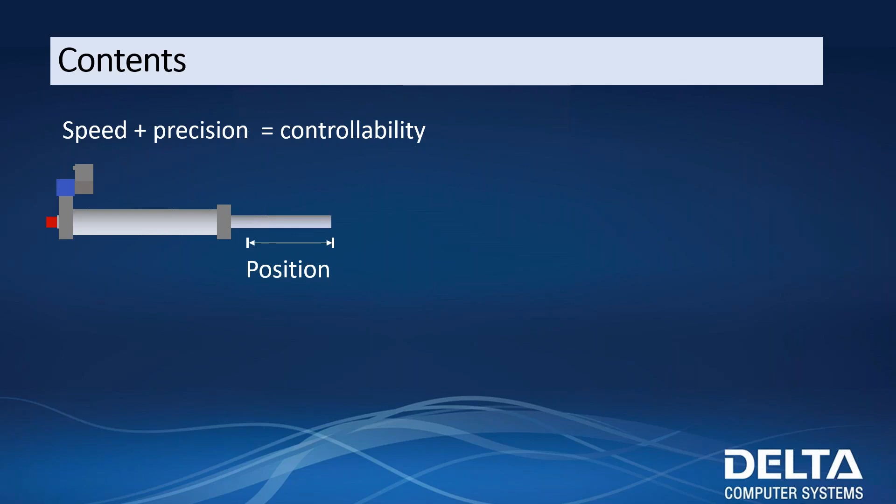So speed plus precision is controllability. All right, it's fairly easy to have a high-speed application, and it's fairly easy to have a high-precision application. But to have them both together, you need a great deal of controllability, and that's where the Delta RMC comes in. With our RMC, we do high-precision position control and also high-precision, high-speed force control.

Here's a list of a few applications. If any one of these applications rings true and you'd like to get a little bit more information, feel free to reach out to GCC or to Delta. We've got more purpose-built webinars that just dive a bit deeper into each of these applications, but the purpose of this is just a brief overview and really more of an introduction to each of these applications.

Presses are one of the applications that we do a great deal of work with. Having that high precision position control and force control is a great tool. We'll get to see that here as we continue through this webinar. Simple machines are another area where high precision and controllability are actually extremely important. I've got a few examples on a live system here that I'll be able to show as we continue through here.

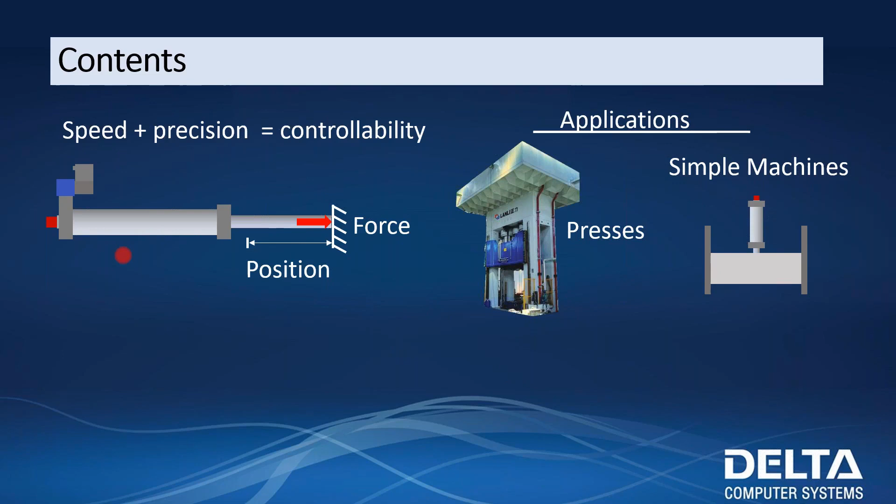Another application that we dive pretty heavily into is the test application. Adaptive cycle control is something that we can do. I'll get into what this looks like, but we're able to look at individual cycles, and based upon your desired peaks and valleys, we're able to actually scale up as we're going through. And then 6 degrees of freedom is another application. This is just a list of a few applications that we've done. There's many more, but here's a great introduction.

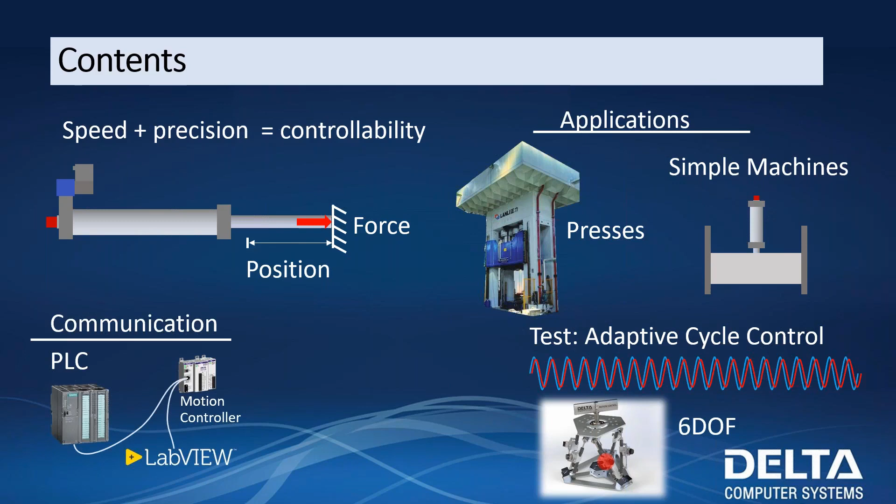Communication is also something that's very important to Delta. If you can do the application, it's great, but if you don't have any way to then take that data from our motion controller and put it into something like PLC or to LabVIEW, sometimes it doesn't really have as much use. So we've also got great examples built for communicating with PLCs, whether it's Siemens, Allen Bradley, many others, and other protocols as well, like LabVIEW or MATLAB, and I'll demonstrate our LabVIEW example here as we go through.

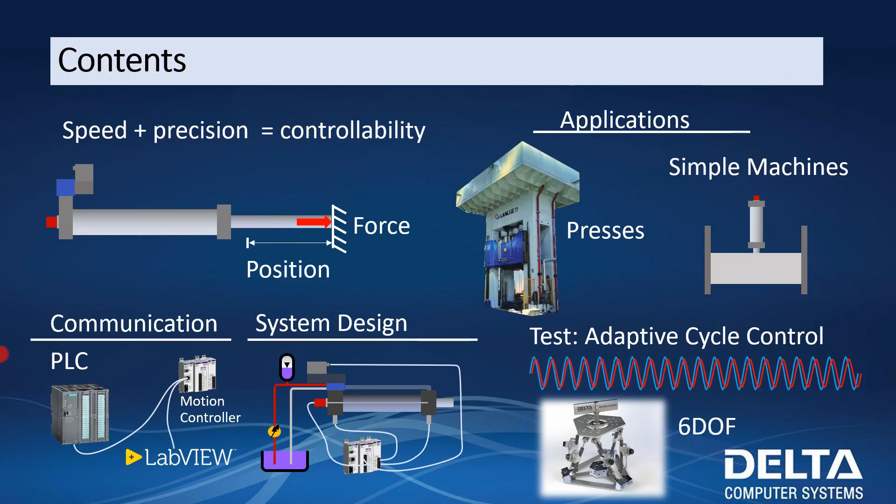We're also going to talk a little bit about system design and just what Delta recommends. Keeping things simple is always easiest. We'll talk a little bit about the do's and don'ts of our hydraulic design as well, and what we found to work best. So I've got a live example here.

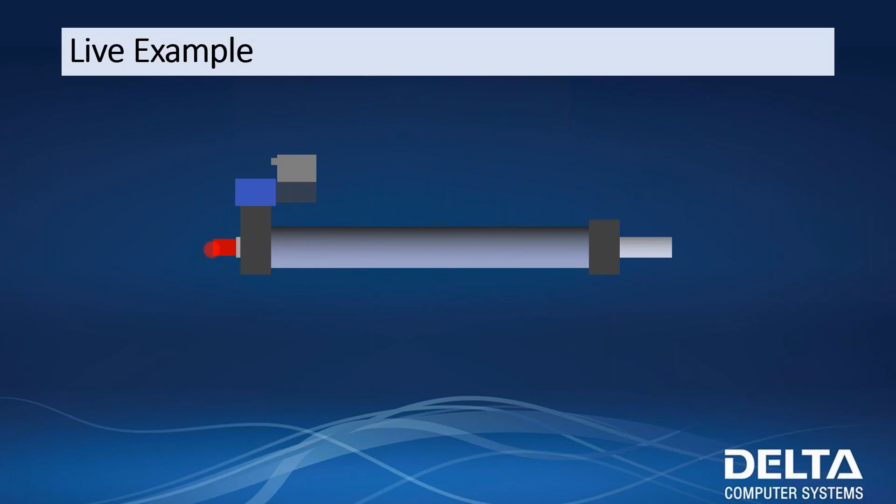I've got a cylinder set up with a high precision, good quality servo proportional valve, and I've also got feedback, high precision feedback that we're going to be using for this example. My cylinder is 24 inches long, 24-inch stroke. I've got 2-inch bore here, 26 gallon per minute valve, a 1 micrometer transducer. Now, with this setup, I can achieve very fast motion, about 35 inches per second is as quickly as I can go, and I'm able to hold position within a thousandth of an inch.

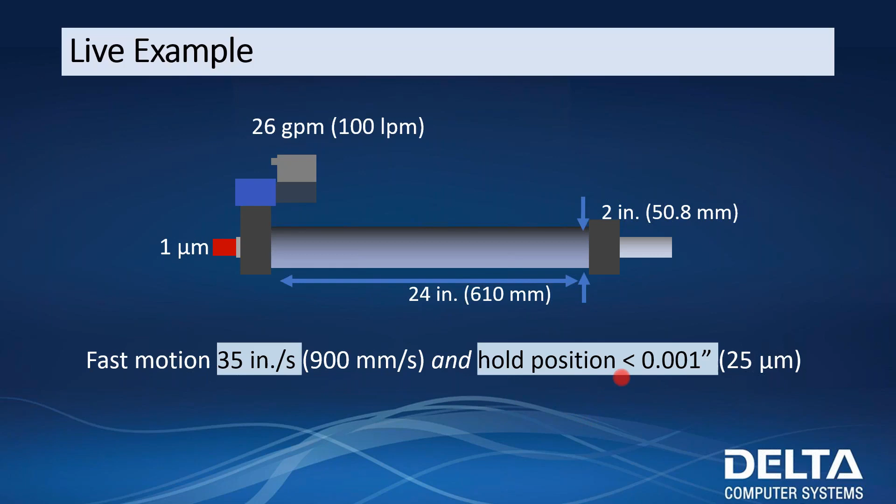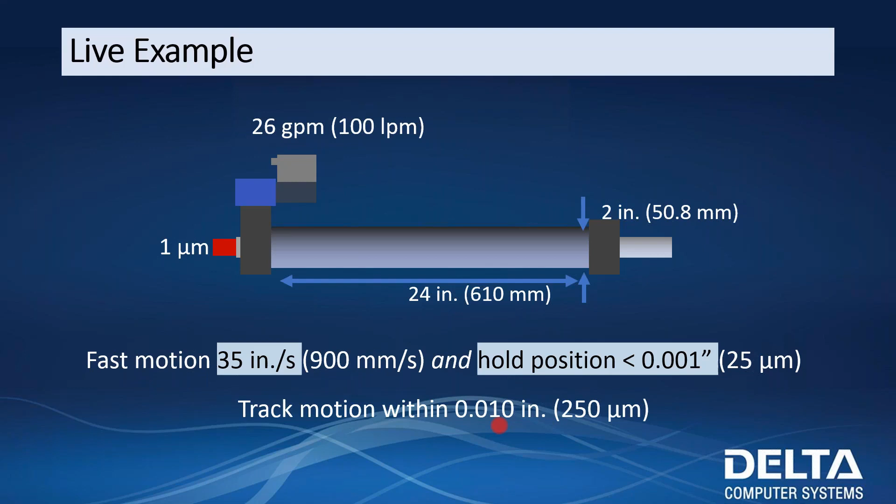I'll show you that here in a second, but just with this setup here, we're able to hold a great deal of precision. We're able to get there very quickly. We're also able to track motion within about 1/100 of an inch. Again, this is very application specific. With our setup here, this is what we're able to do. So without further ado, let me jump to our live system, and I'll give you guys an introduction here. Okay.

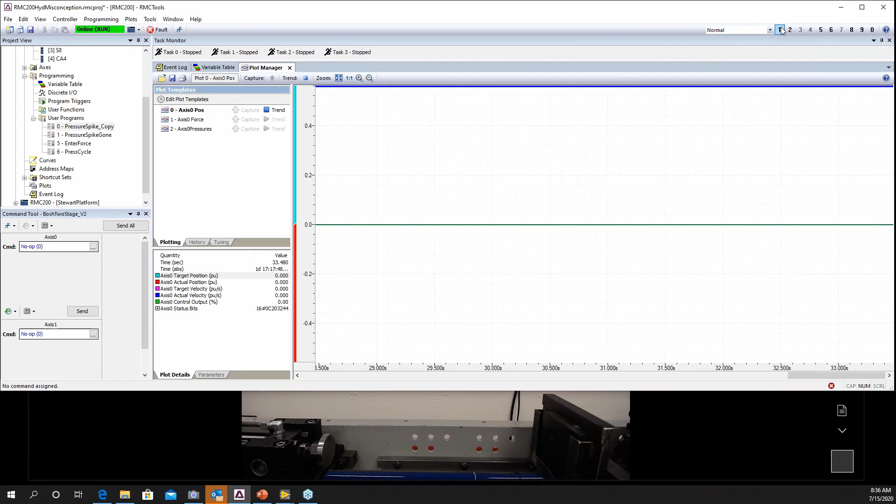Okay, so you saw the cylinder jump out here, and I can see my move that took place here as well. So this move right here, I can see as I'm going, I'm holding with a great deal of precision. Even while I'm traveling in this move, 20 inches per second, I'm still holding within about a thousandth of an inch, really. You can see my actual position is 12.220, and my target is 12.220, and my actual is 12.219. So we're holding a great deal of precision here.

And I can see kind of settling there a little bit, but if I trend my plot here, I can see that I'm just jumping back and forth about a thousandth of an inch. I go up to 18.001, and I go down to 17.999. So I'm holding very steady. You can't even really see that thousandth of an inch here on the cylinder itself.

Okay. Now I can do another move, and this is just all built into Delta. We've got a very nice set of commands here. This is our basic move command. I choose a position, a speed, an acceleration, and a deceleration. And this is all scaled in inches right now. So I could, for instance, say I'd like to move to a position of 2.

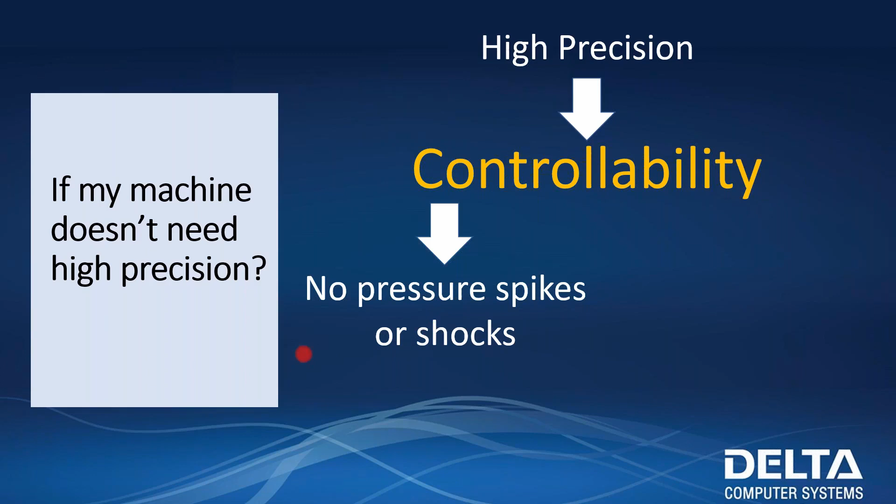But having these spikes eliminated is going to give you a much greater lifetime on your feedback, on your transducer, on your valves, on your cylinders. Everything's just going to last longer when you have high precision and controllability.

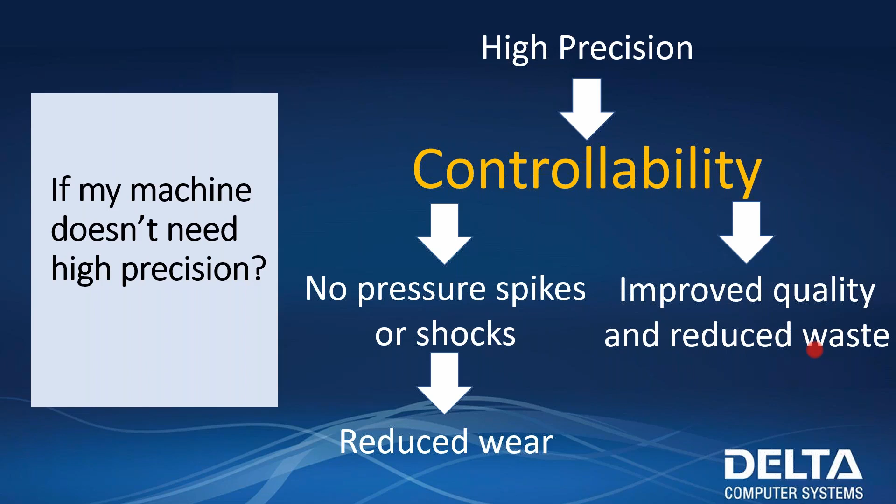The other thing is you're going to have improved quality, and you're going to reduce waste. Much easier to improve the quality, make sure that things are consistent with this controllability, reduce waste, only go as quickly as you need to. You know exactly how much pressure you need. It just makes things a whole lot easier in your system.

So here's a great example of a simple machine that doesn't really require precision, but a high degree of controllability is still very beneficial. This is an application that we were just involved with recently. This is the mining application where there's coal on a conveyor belt, and there's a... And again, it's a very simple application, right?

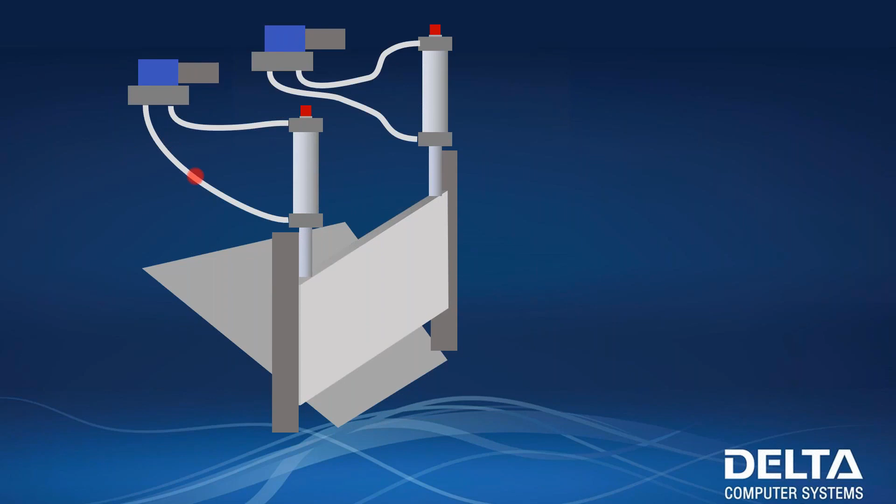Just having two bang bang valves on here, what this does is we start to see pressure spikes. Things start to wear out. For this particular application, every 6 months or so, they were having to replace components because there's just so much force constantly being seen by these cylinders and these valves and these transducers.

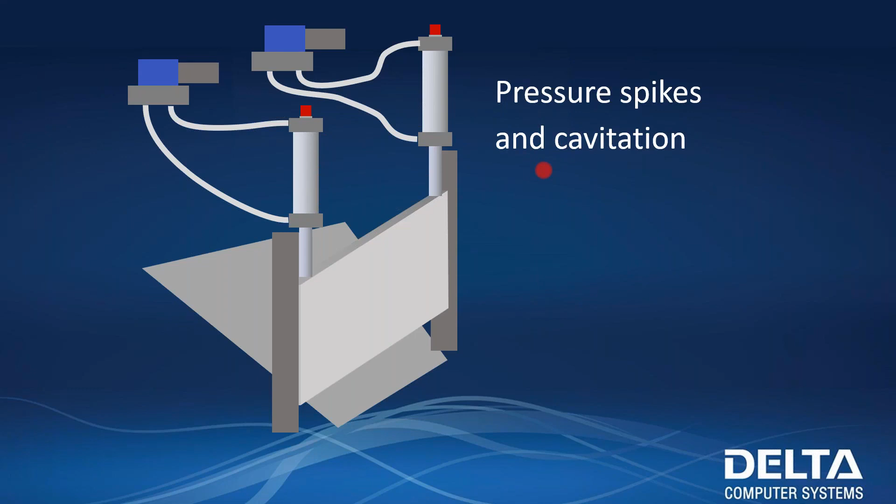We see cavitation as well. With the pressure spikes, when that pressure goes below zero, we'll start to see cavitation, little air pockets inside the hydraulic fluid, and that's what can really start to wear things down.

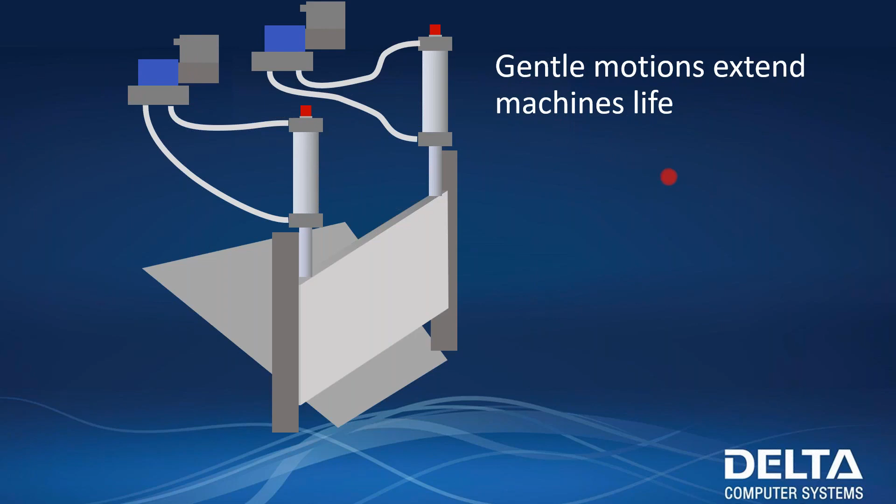Okay. Now, if we instead make these servo proportional valves, we can have gentle motion, we can extend the life. Sensors are going to last a lot longer. That's one thing that really will start to wear out quickly. But the entire life of the machine is just going to be much better. You're going to be replacing parts at a much lower frequency when you have gentle motion.

Okay. See what that looks like here on our system. So again, I'm going to be using my live system here. I'm going to trend my axis 0. Right now, I'm trending. I can see I've still got my target and my actual position, the blue and that red line there. I also have channel A pressure and channel B pressure.

So I have pressure transducers on either end of my cylinder, so I'm able to see what the pressure spikes are going to look like here. So first, what I'd like to do is run my pressure spikes program here.

Now I'm going to briefly go through the logic. You'll see that Delta has a very nice approach for actually setting up this logic. With the setup that we have here, you're able to achieve whatever it is you'd like to in your system very quickly, and even better than the speed, it's very easy to troubleshoot through, understand exactly what's going on, and if there's a problem in the system, we're able to diagnose it very quickly.

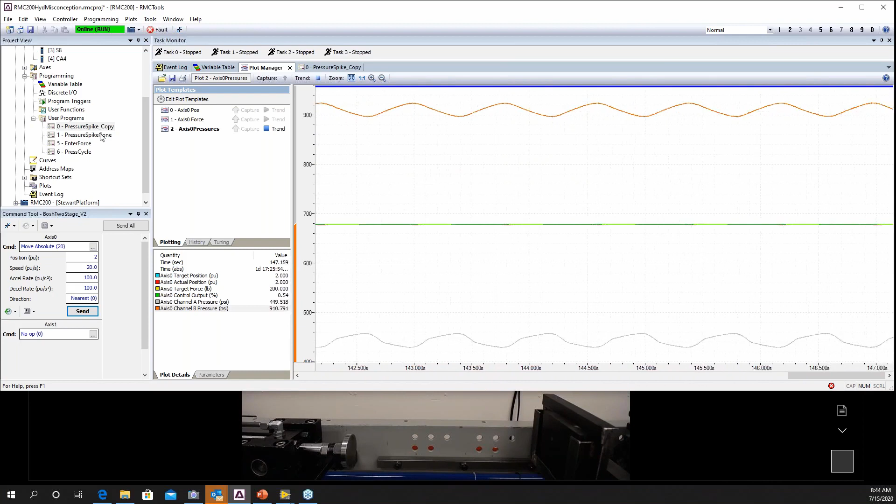One quick thing I want to mention here, I'm going through this very quickly. I know that there's a lot of information here. Again, if you would like to dive deeper into any one of these topics, please reach out to GCC. They're great. They can really help you guys out, and we've got a whole lot more information on any one of these individual topics. Okay, so let's see what this program looks like here.

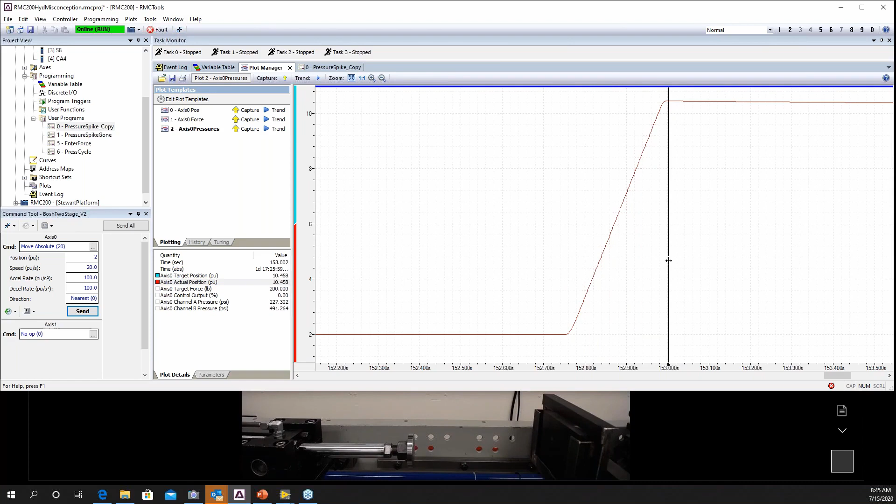All right. So we'll first look at our actual position, see what this looks like. So my actual position, this red line here, starts at a position of 2, and we build up to a position a little bit past 10. We're going to about 10.5 inches here, so maybe for this application, that's fine. My control output, it's just ramping right up, right? This is open loop control output, so there's not really any controllability here.

Now, when I look at my pressures, I really get a better picture of what's going on in the system. You can see the orange line here is my pressure on port B, and the gray line here is my pressure on port A. It's very noisy, especially at the end and the beginning here. There's just large spikes, especially at the end here. This isn't going to be good for the system. I don't know if you were able to hear it through my mic, but very loud, very noisy. There's a lot of shock here, and it's just not really what you'd want if you're trying to prolong the life of your components. Okay, so that's without controllability.

Let me show you another program, and this would be more of Delta's approach. Again, I'm just moving to the beginning here. You can kind of disregard this step. This is really the step that we care about and the step that's going to be achieving exactly what we did in open loop before. I'm, again, just using a move absolute command, moving to a position of 10. This way I can specify my speed. In this case, I'd like to move at 20 inches per second with an acceleration of 100 inches per second squared and a deceleration of 100 inches per second squared.

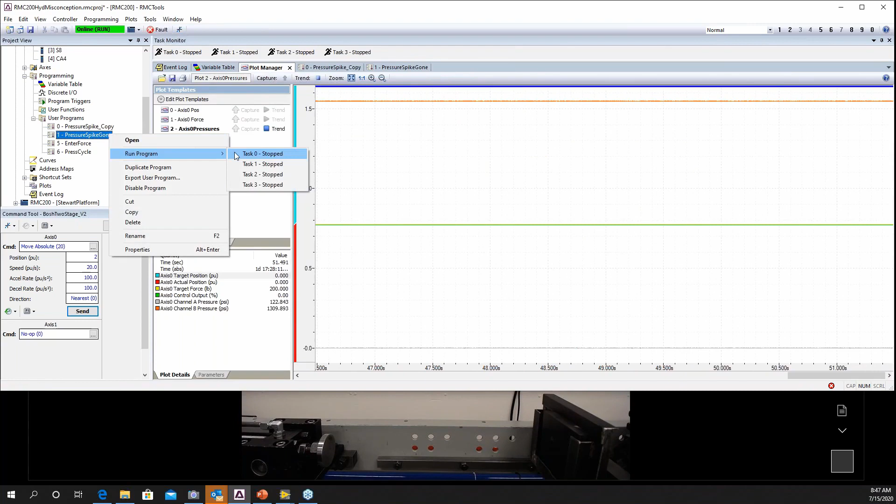Now, after this, my program ends, and the Delta RMC is going to make sure that we maintain this position of 10 inches. So very simple, easy to set up, and we're going to get a great deal of controllability from this setup here. So let's see the difference. So this section of my plot here is what I really care about. I'm going to create a trend plot really quick. Now, we'll get rid of the other items.

At first, my motion profile doesn't look all that different from the one before. The big change here is that I actually get to 10 inches rather than 10.5. But again, we're going to say for this application, 10 or 10.5 doesn't matter quite as much. But if I look at my control output, you can see it's a much smoother ramp, right? It's not that violent jump up and violent jump down.

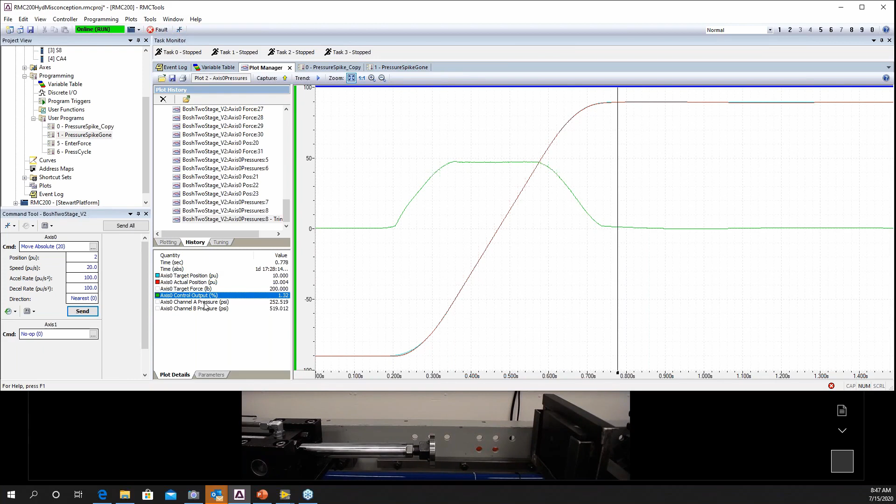If I look at my pressure, you can also see this is a much smoother pressure profile on both the A port and the B port. Something like this, you're not going to see large damage to your controller because we're able to control these accelerations. We're able to reduce them and get them to a point where this system is just going to have a much longer life. Okay. So let's jump back to our slideshow.

So here's a few common position control features. You've seen a little bit of what we can do, motion profiles. We could have much longer, much more involved programs, user programs that you saw. I demonstrated just a few smaller user programs, but we can get much larger and much more involved programs.

Curves, I'll demonstrate this here in just a minute, but we can actually plot points, and we can then have the controller follow those points and follow a profile. A good example of someone using our curves is USNR. If you haven't heard of them, they're the world's largest sawmill machine manufacturer. They love Delta Control products. They've been using our products and our curves in specific for curve sawing. It's a great tool and just really useful. You'll get to see it here in a second.

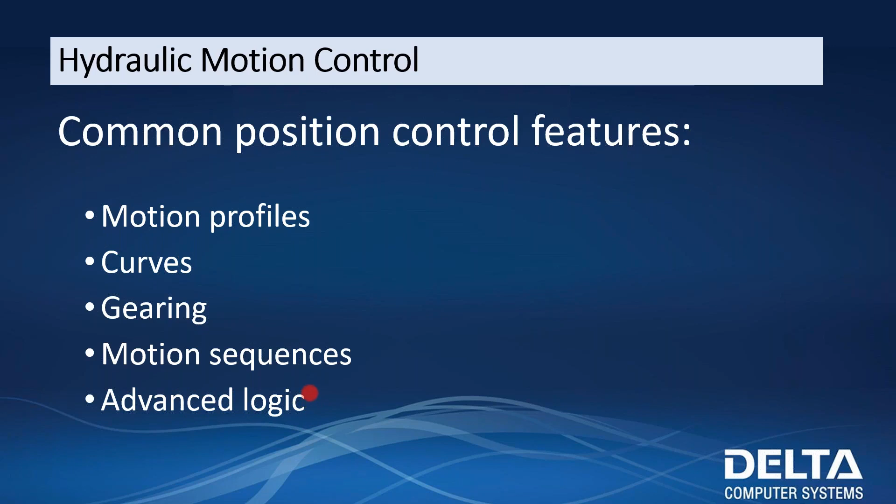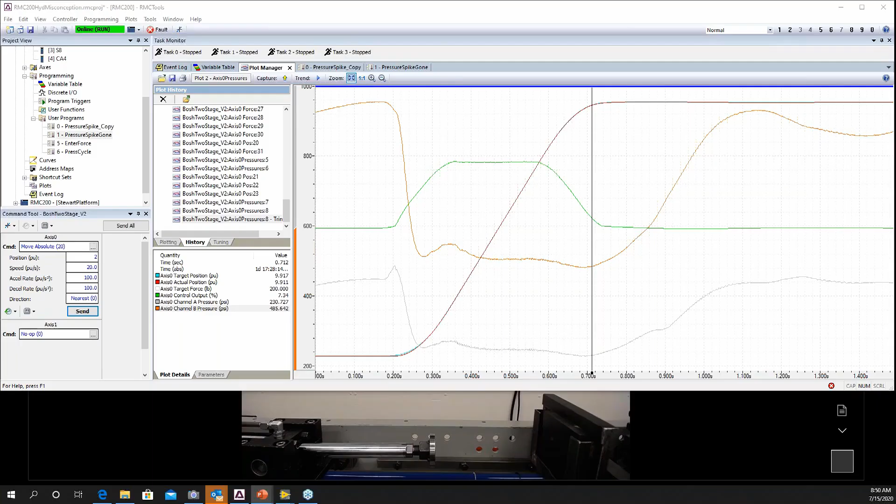I'm going to jump back to RMC tools, and I'll quickly show you an example of our curves here. Again, since we don't have a ton of time today, this is just a brief overview. If you'd like to see more, go ahead, reach out. Delta also has a large library of webinars where we go more in depth on each of these topics.

I can add more points just like this. I can enter them in, and I can copy and paste entire profiles like this from an Excel worksheet. Say you have 1,000 points and you'd like to bring them all into RMC tools. So it's a very versatile tool. We're able to run these profiles and able to do it no problem at all. Okay, so that's our curves. That's just a brief introduction. Let me jump back here.

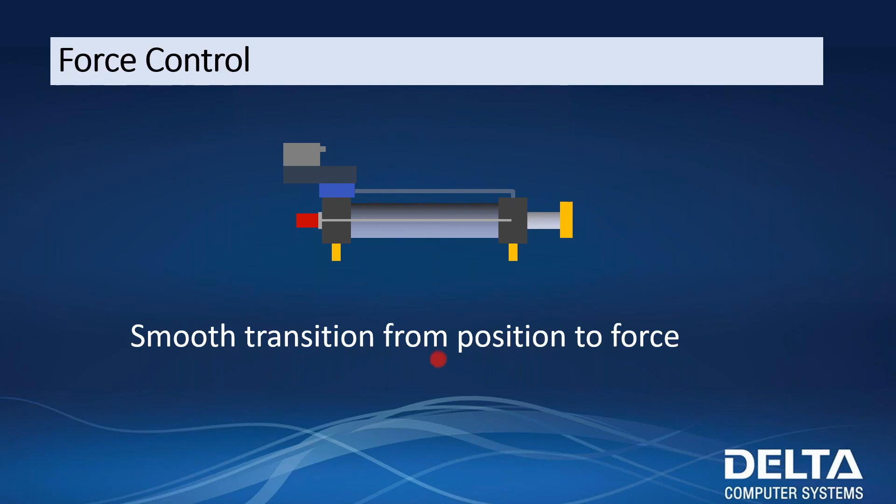All right. Now, force control is something that's difficult for a lot of controllers to achieve, and it's an area that Delta really excels in. Now, the hardest part of force control is generally the smooth transition from position to force. This is where a lot of things can go wrong. It's difficult to get a nice smooth transition where you don't push too hard on your part, but in addition to that, that you, at the same time, get up close to your part very quickly. Doing these things together can be a challenge for many controllers. So let me show you our solution for that.

Okay. So our Enter Force Control project here, I'm not going to go over it too much. It's a little bit more advanced. I want you to take a brief peek at it here, but I'll show you what we're going to be doing here. Basically, the idea behind this is I'm going to be going quickly up to a position.

Then I'm going to be slowing down as I start to get close to my part. Got a speed of 20 here, and then a speed of 1 here. Once I see a little bit of force, I'm going to go into force control. And then for this program, we ramp up and down between two forces.

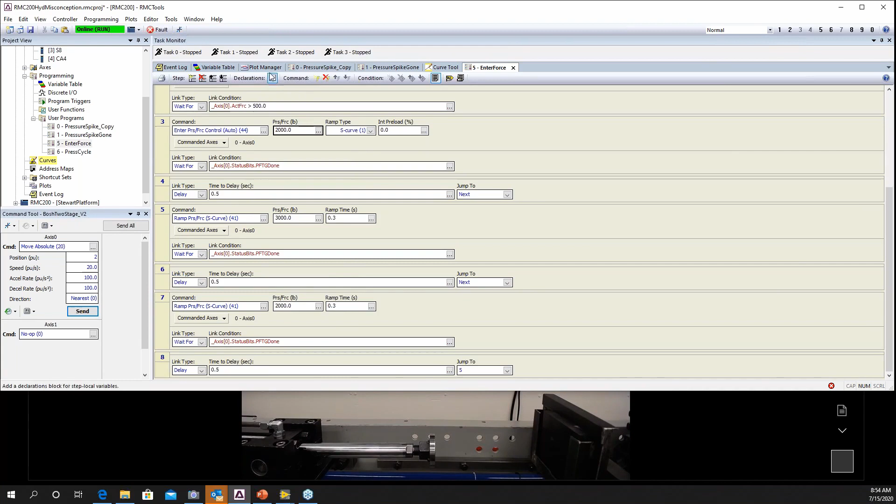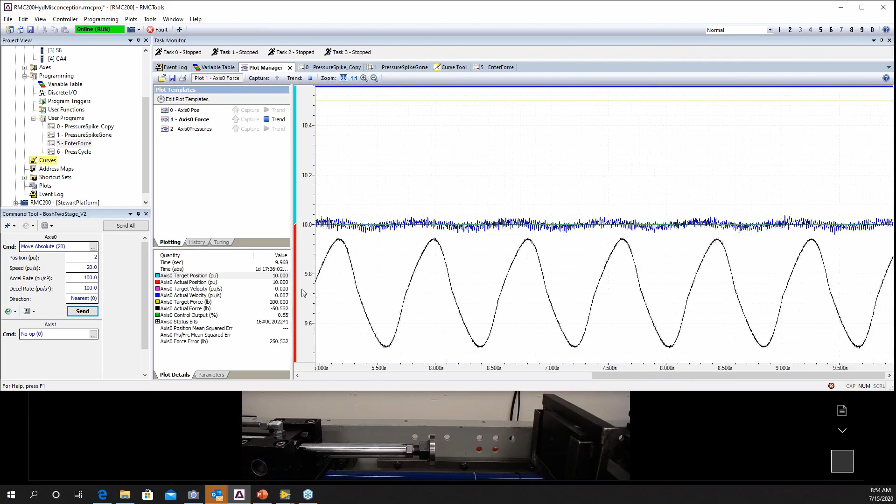Right now we're not trying to hold force. Instead we're trying to hold position. You can see we're holding within 1/1000th of an inch. We're just free floating. We're not really seeing any force at all. So I'm going to run my Enter Force Control program, and you'll see my cylinder jumps forward quickly, slows down.

We make contact. We're controlling very well. We're ramping up and down between a couple forces. Okay, so you can see that there. Right now we're holding force within, looks like here, once we settle down, within 5 or 6 pounds. So fairly precise. If we have a different valve on here, we could even get it more precise, but we can do very high precision force control.

So if I analyze my plot here, I can see this blue line here, my velocity. It's gone up very high, gone quickly, and then we've slowed way down. We could probably even reduce this time here if, say, this was an actual production model and you wanted to get quicker cycles, we can reduce this down.

But as we get close, we start to see a little bit of force if I zoom in here, and then we go into force control. We start tracking, and we're tracking along with our force control, and we're able to control this very well here. Let me show you this one more time just in case you missed the physical cylinder.

Okay, so we're tracking to the beginning. I go quickly up, making it to force control, and that's a very smooth transition into force control here. Okay, so that's one application. Let me show you another.

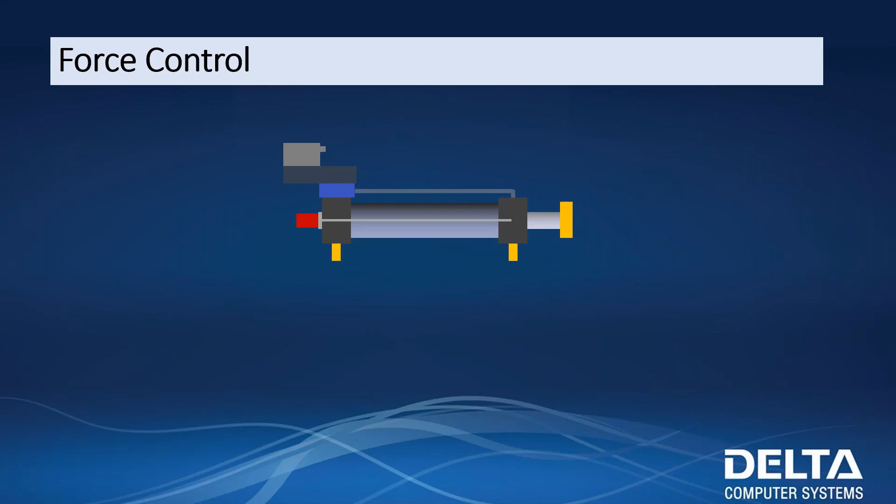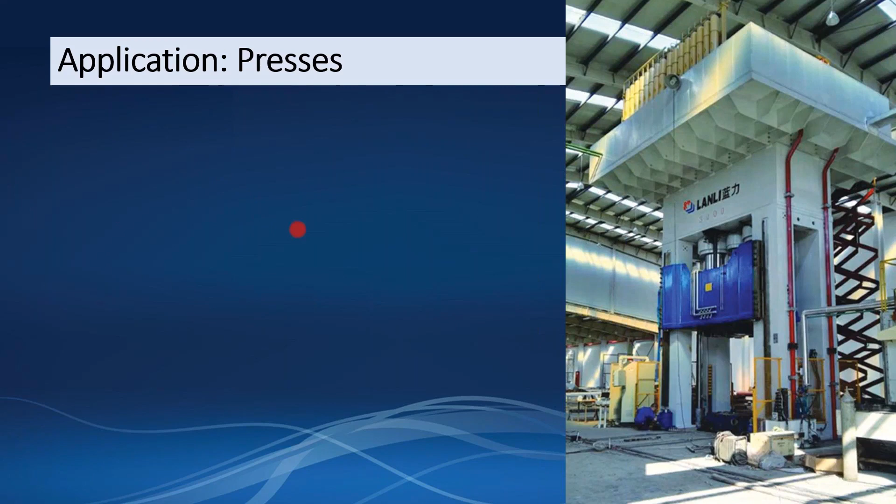Another application here is going to be presses, right? This is something that Delta does very well. We're heavily involved in the press industry, and there's some unique challenges to the press industry here. So position and force need to be controlled, as we saw before. There's also a synchronization that needs to take place. Now, this synchronization takes place through a program that we have called electronic platen leveling.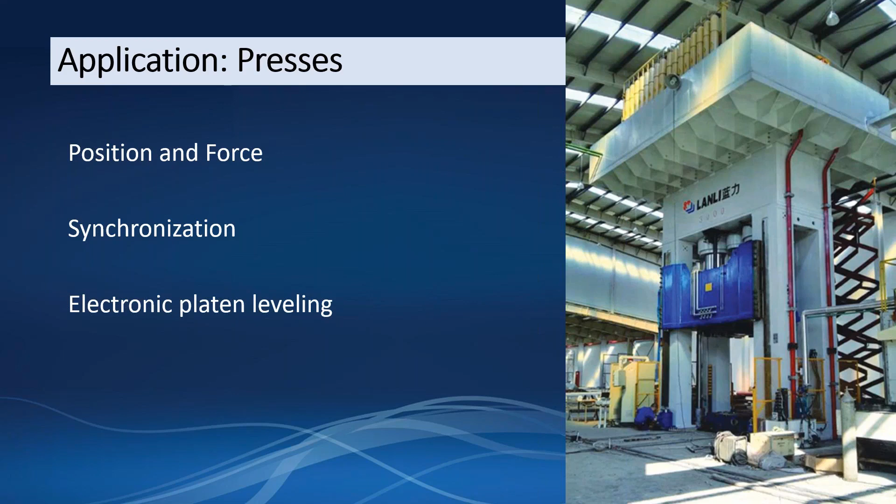This is another application, again, that requires a lot of synchronization and force and position control, something we do very well. So what I want to do is pull up a quick video, give you guys an idea of what this actually looks like.

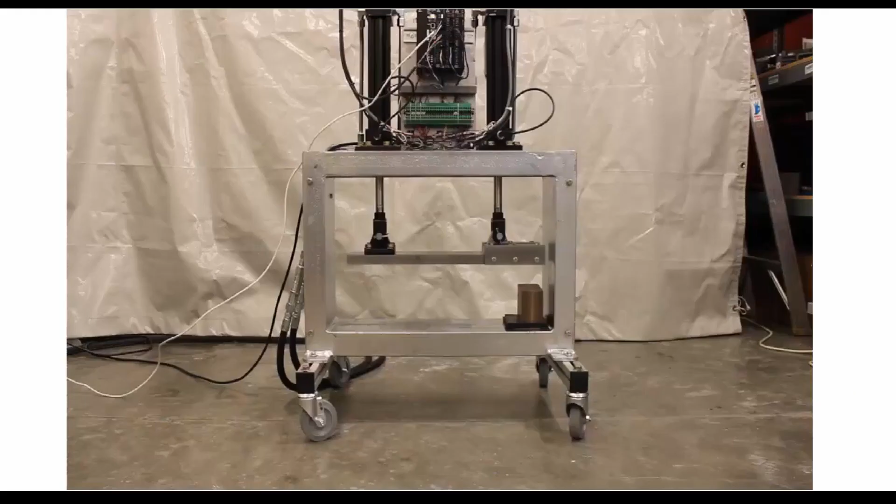The RMC-151 motion controller from Delta Computer Systems offers synchronized position force control on multi-ram presses, where the ram positions must be identical regardless of the load distribution. This two-cylinder press has a very flexible platen. The RMC will keep the platen perfectly level while controlling the total force.

The platen moves down in position control, then seamlessly switches to force control and ramps the force up and down. The cylinders are staying level with each other, within approximately 0.003 of an inch. With a stiffer load or slower ramps, it is easier to achieve even tighter tolerances. Notice that the load block is not at all centered in the system. This illustrates the ability of the RMC to keep the cylinders synchronized.

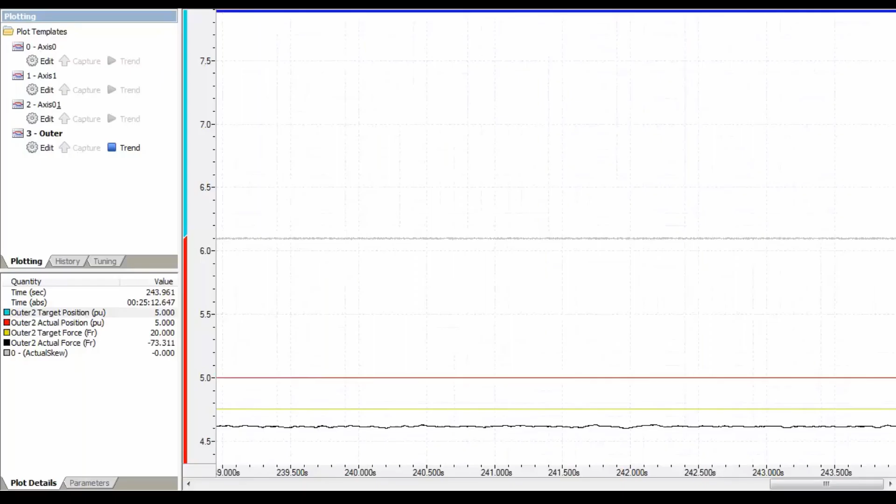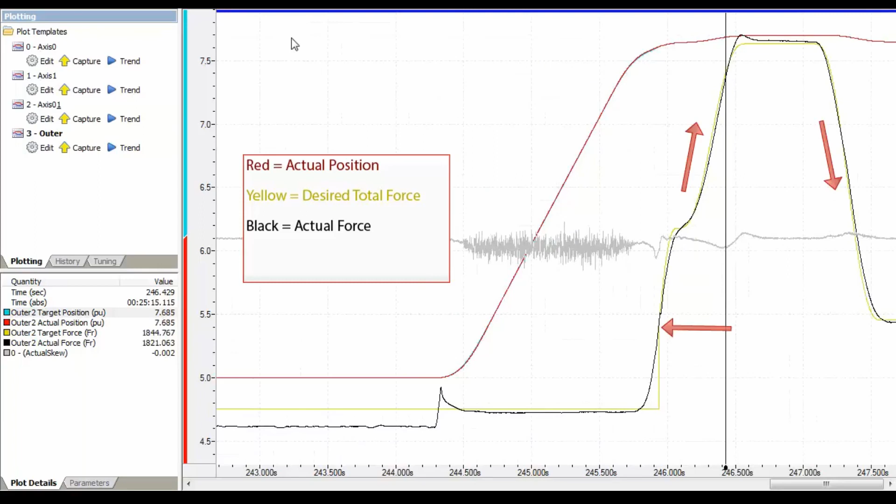Let's look at a plot of the motion. The position is red, the desired total force is yellow, and the actual force is black. The press moved in position control, transitioned into force control here, then began ramping the force up and down. Looking at another plot of the force ramping, we see that the skew between the cylinders, shown by the gray line, is 0.002 inches at the cursor.

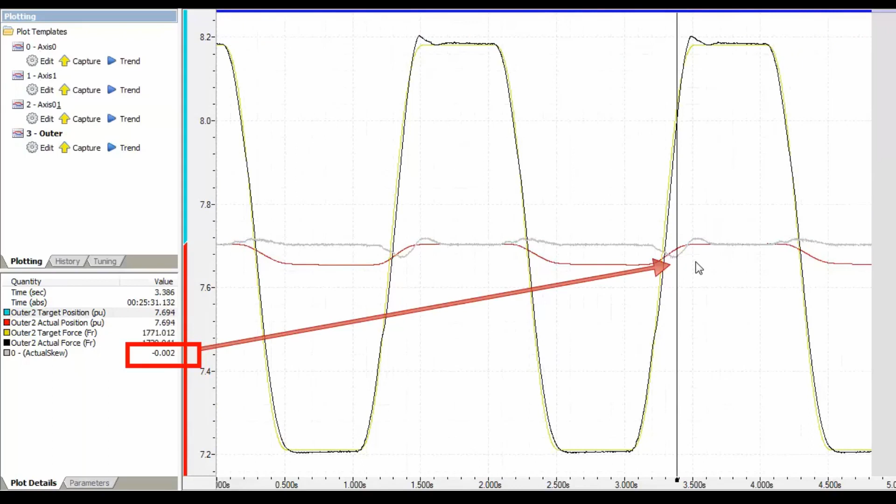The RMC-151 can handle up to 6 axes of synchronized position force, depending on the feedback signal type. For more details, contact Delta Computer Systems.

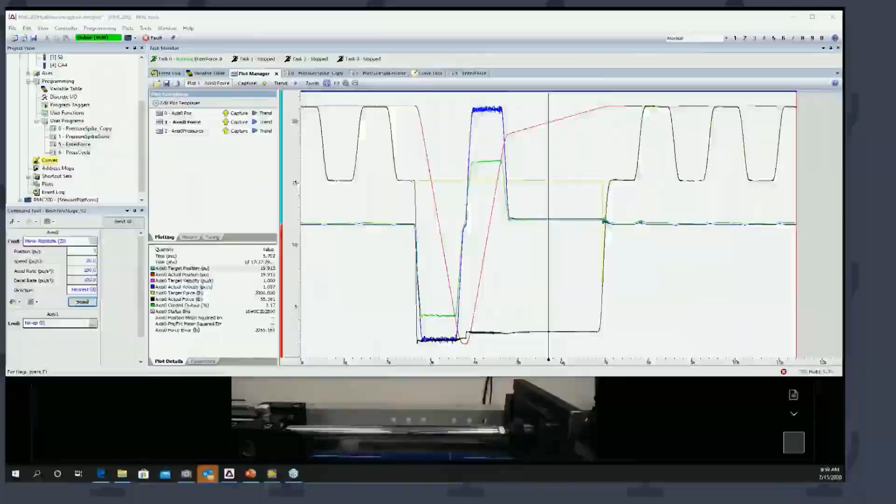Okay, so that was our video. You were able to see there how we do the synchronization. That was a 2-cylinder press. Generally, we're going to be doing the synchronization in something more like a 4-cylinder press. We've done this many times with great results. If you'd like to see some case studies, both Delta or GCC would be able to provide that to you.

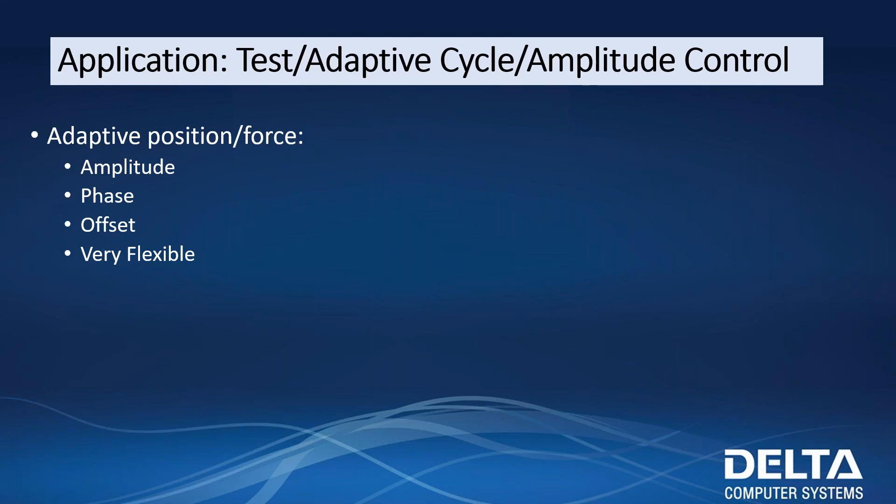Okay, so let's move on in our slideshow. We're also very heavily involved in the test industry. Now, here's something that we found Delta has that has been very useful for the test industry in specific. We call this our adaptive cycle or adaptive amplitude control. We can adapt and control both position and force. We can control amplitude, phase, offset, and this is a very flexible program.

Basically, what this does, I spoke about it a little bit in the beginning. What this does is it looks at where your targets are, right? It looks at where is your target peak, where is your target value, for instance, with amplitude control, and cycle to cycle, we actually adjust so that we hit those targets. The reason that we do this is sometimes you've got a testing application where the frequency that you're trying to do things with is just too quick for a traditional PID. And so using this approach, we're able to get very good results.

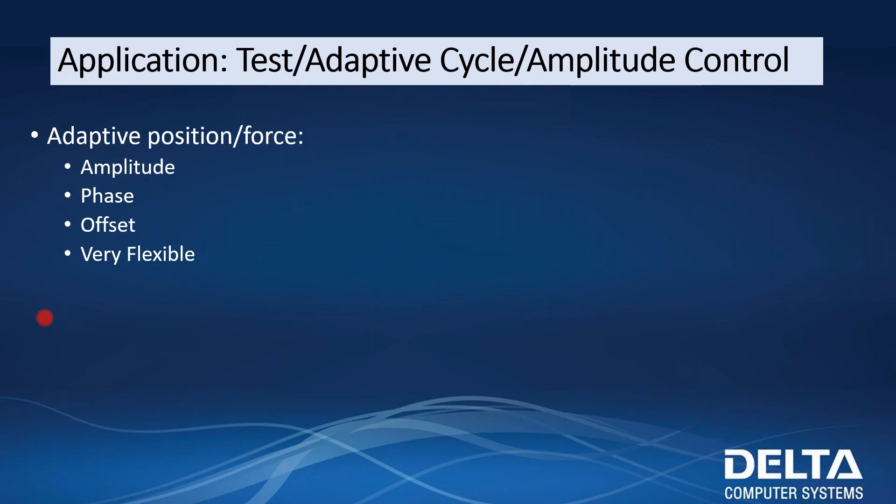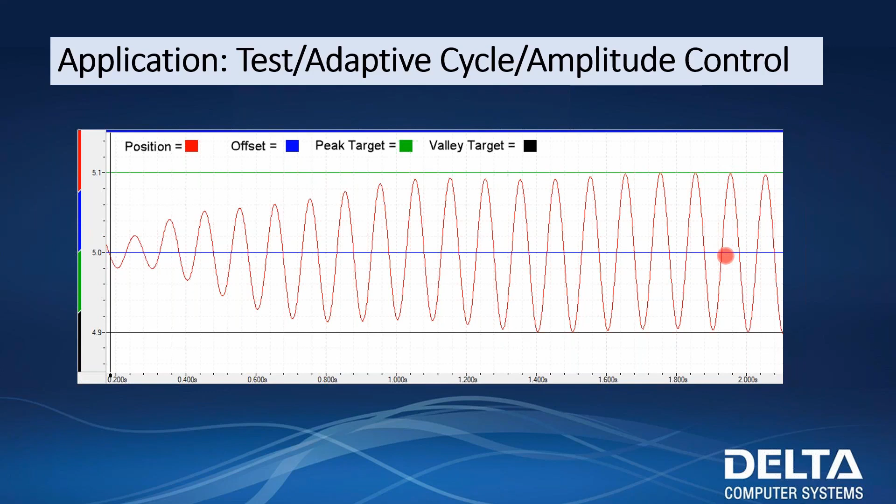Here's an example of what this looks like. So this blue is my offset here. The green is my peak target, and the black is my valley target, and the red is my position. So even a system that's not really tuned up very well, like this one is on here, you can see the first cycle goes, and then we start to build up higher and higher until we get to a steady state around here where we're hitting our valley, we're hitting our peak, and we're right at the desired offset. So using this approach is a great way to achieve cycle control for a testing application.

And it's also very easy to set up. Again, we have these examples readily available. If you'd like one of these examples, just let someone know and we'd be more than happy to provide you with them. But it's very easy. All the programming has already been done. All that's left for you to do is enter in where you'd like your amplitude, offset, and frequency. And the rest has already been taken care of.

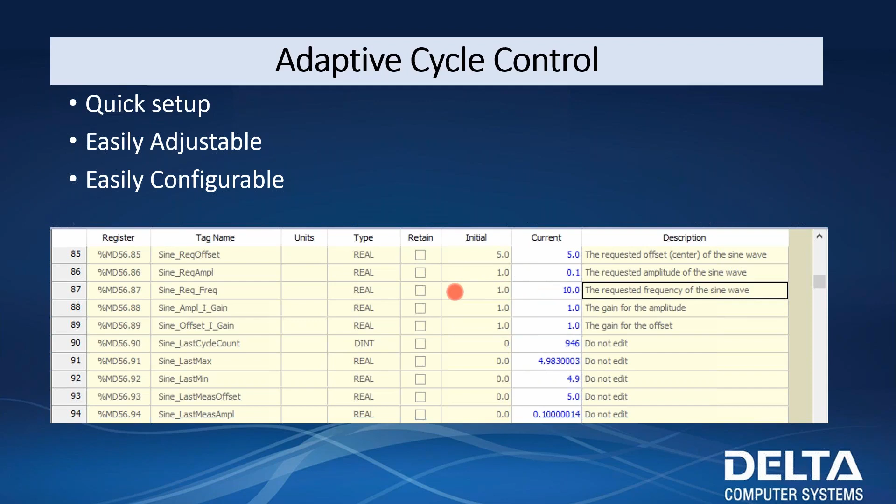Vehicle simulation is another thing that's great with these 6 degree of freedom systems. We're able to gather data, acceleration data from real-world examples, and then we're able to play that back through our 6 degree of freedom system so that the manufacturers can test and make sure that their cars are going to be all right without actually having to drive them. Okay.

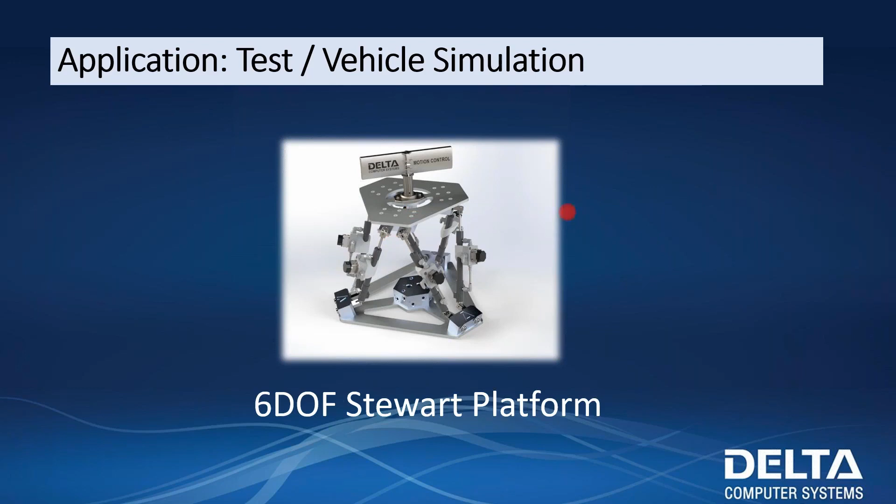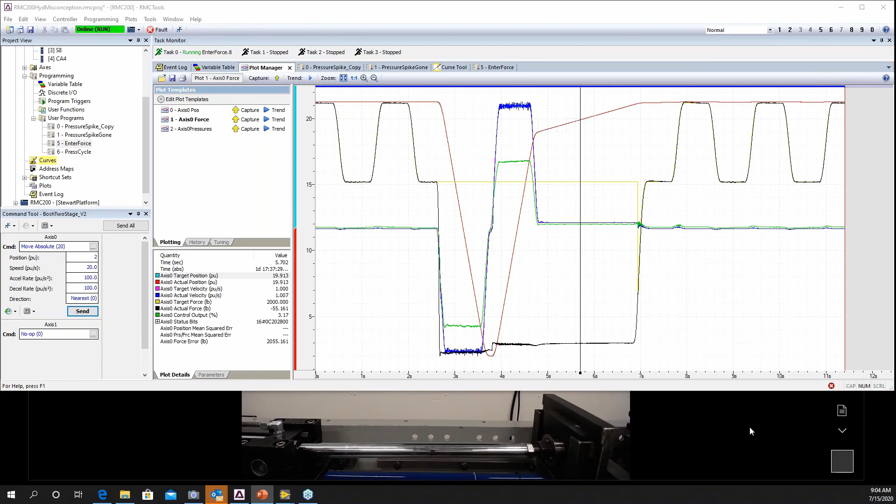Now, let me show you a live example of this. I'm going to swap videos here. And this is our mini 6 degree of freedom Stewart platform here. I'm going to flip on the hydraulics. It's going to be a little bit noisy here for just a second. And I've got a second controller here that I'm going to be running our tasks with. The cylinders are a little bit bottomed out, so I'm just going to extend them up here.

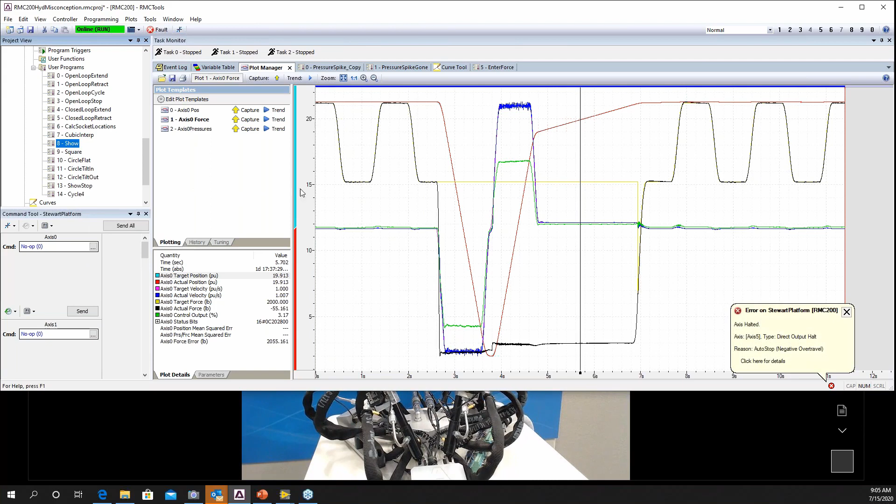And let's go ahead and run this. I'll show you the video here in just a second. Just a little pause out here. Let's see if I can just show you one of them. Okay, so this is our 6 degree of freedom system here. You can see it. Let me minimize my screen just a little bit.

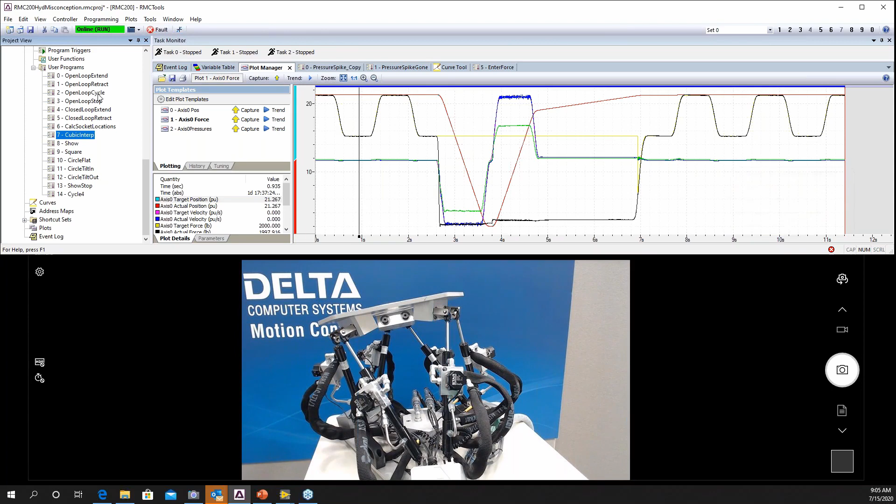I'm going to go ahead and start our program here. I've got a little bit of negative over travel. See if I can just expand this a little bit here.

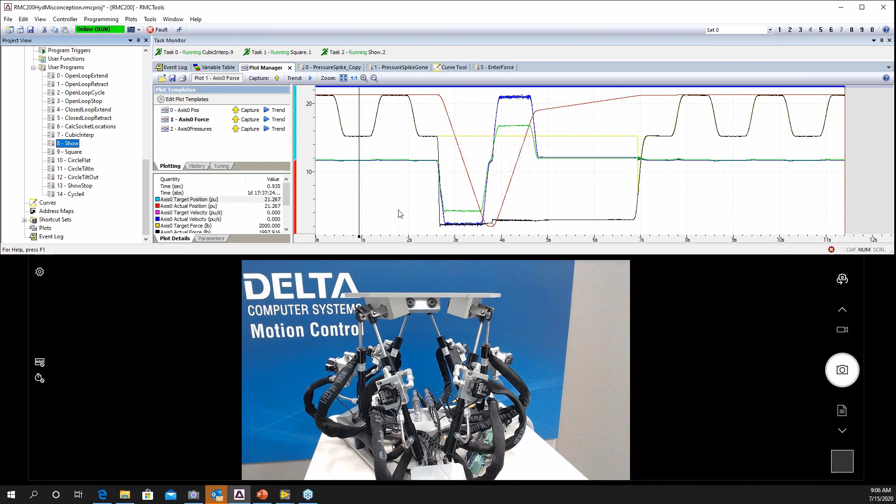See if I can get this running. Okay, here we go. So it was bottomed out at the top, bottomed out at the bottom. We have some stops set up just for safety. Just wanted to make sure that this is right where it needs to be. This is our 6 degree of freedom system. It's going through a show profile, going through multiple programs here.

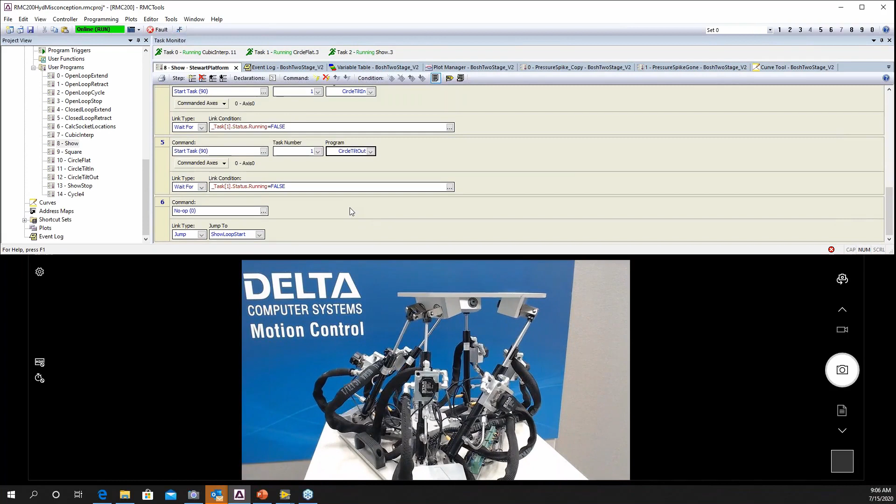You can see on the top of my screen, basically go through a number of programs. Go through a circle flat program, a circle tilt in, a circle tilt out. I've got quite a few different programs going on here. But you can see we're controlling this very well, moving really nicely. Again, this is just a demo, but we've got all the code to get this set up.

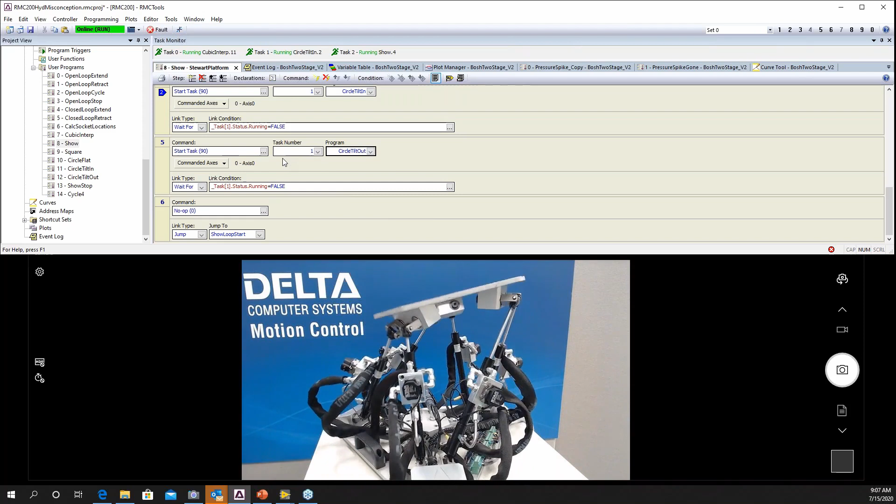We were actually just talking with a customer not too long ago about how easy this would be to get set up. And since we have all the code built in, really the toughest part is just going to be measuring the distance of where your cylinders connect and making sure that that's entered into the RMC. But everything else is set up, and it's a nice, controllable system.

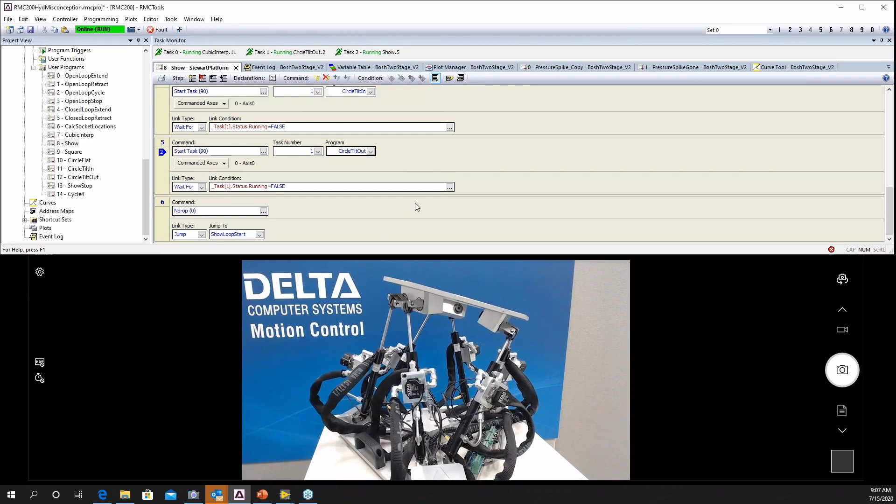Okay, so I'm going to stop this. And I'm going to turn off my hydraulics here. And we'll just turn off this controller. That's our 6 degree of freedom system here. Okay. I'm going to jump back to our slideshow now.

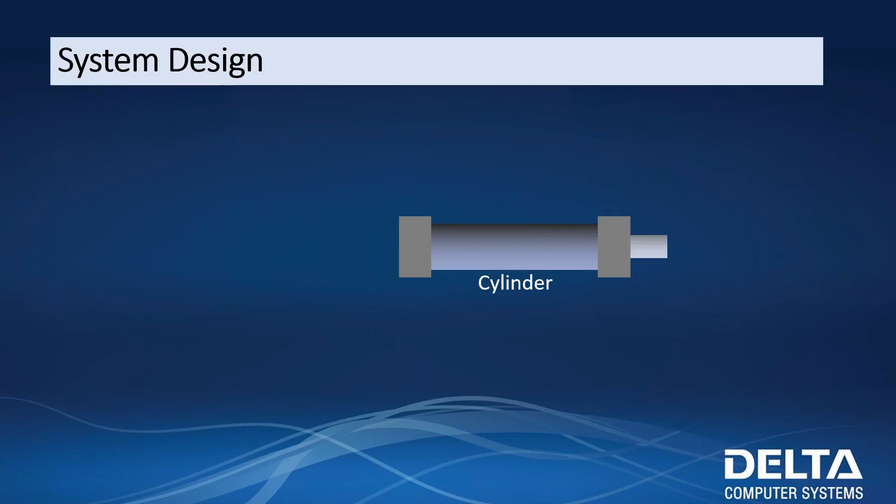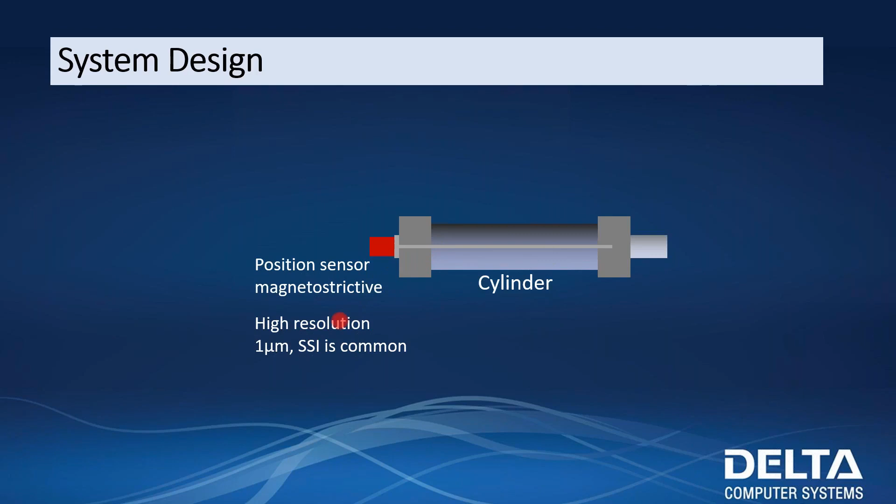Now, I want to talk a little bit about system design. Position sensor, magnetostrictive, high resolution, 1 micrometer SSI. 1 micrometer is a pretty common resolution for SSI transducers. This is a very nice setup and something that we highly recommend you getting if at all possible.

High quality linear proportional valve. Having these two components together is basically what we've been seeing on the live system. The valve mounted directly on the cylinder is an important part of this here. Having this valve mounted directly on the cylinder guarantees that we're not going to have any springiness inside the system. It's going to be much easier to control. It's not going to bounce.

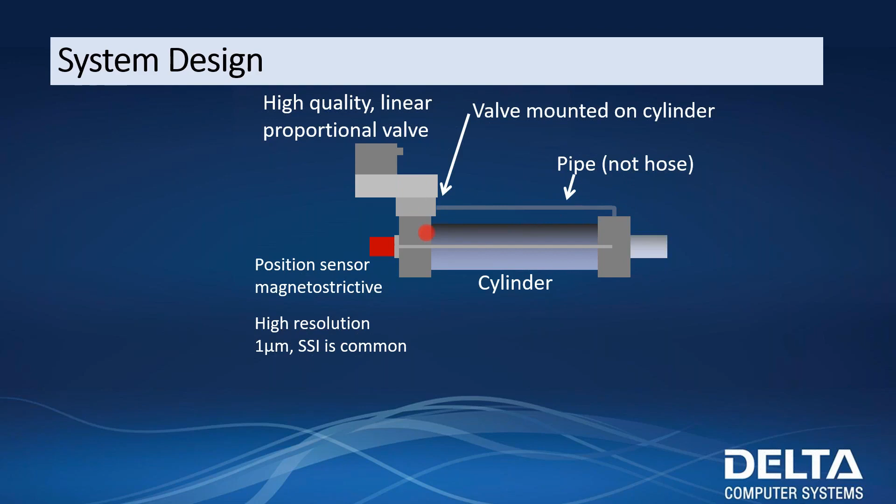If you, say, have a long hose in between the valve and the cylinder, that hose is going to act like a spring. It's basically going to expand and retract, and it's going to make the system much more difficult to control. So if you can have hard pipe and your valve mounted directly on the cylinder, that's how you're going to have the best chance of great control.

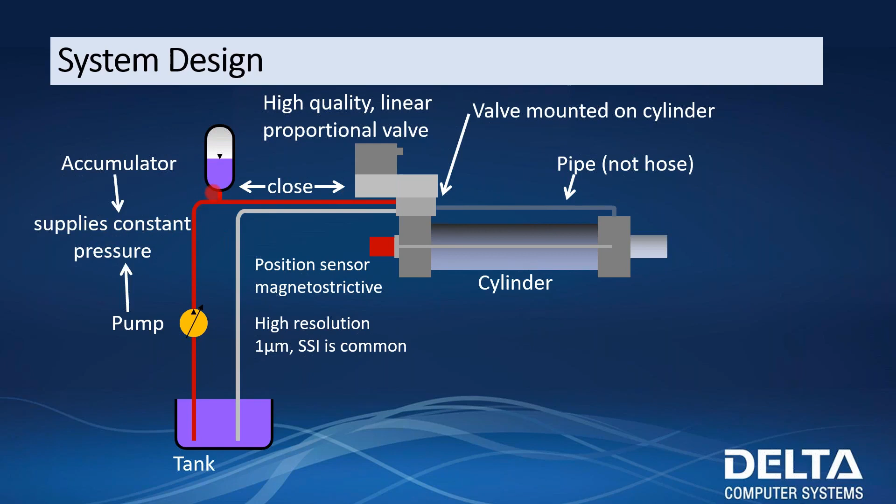A pump and a tank, these go right to your valve. Sometimes you can have it this simple. If your system allows for this, it's great. It's a nice, easy way. The other thing that we want is to have an accumulator close to your valve so that we're going to be supplying constant pressure. So that's what the accumulator does, right? It basically charges up and makes sure that you've got this nice, smooth, constant pressure in your system. And then of course you have the motion controller for the hydraulics.

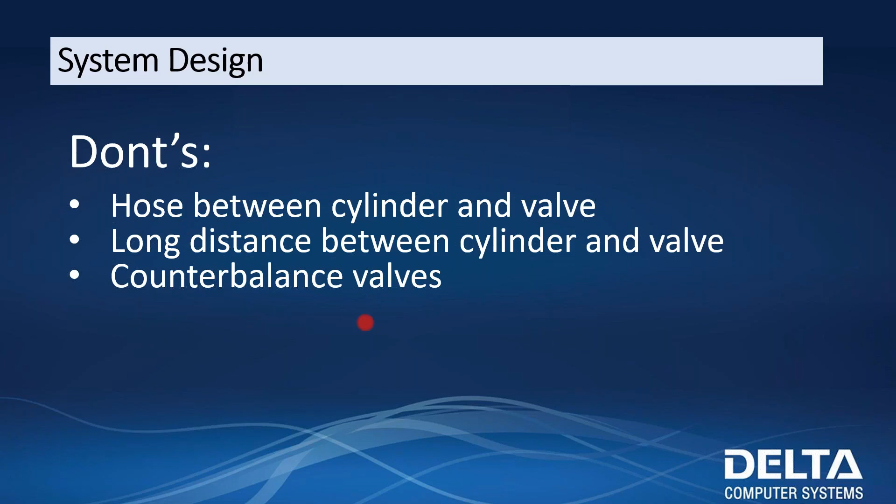All right, here's some don'ts. Hose between the cylinder and valve. Like I said, that creates springiness in the system, which makes it much more difficult to control. It brings it into what we call a second order system. Long distance between the cylinder and the valve. Again, this is going to provide the springiness to the system. Counterbalance valves, if you can avoid them, we'd recommend it. Some applications it makes sense, but a lot of them, it just makes things very difficult because you're basically trying to control something electronically and hydraulically at the same time.

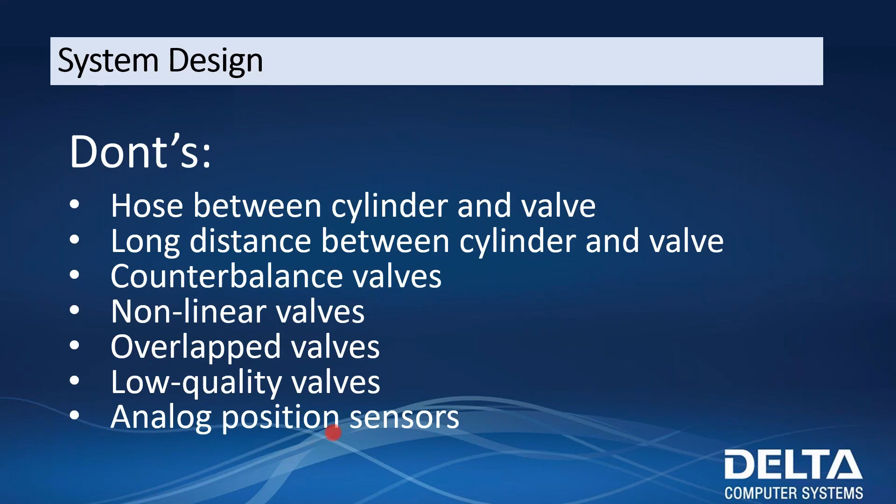Nonlinear valves, this is another thing that makes things difficult to control. Having a nice linear valve with no deadband is the way to go. It just makes control much easier and you'll be much happier, especially if you need very high precision control. And just avoiding low quality valves is really a must. Analog position sensors, sometimes they're your only option. If it's, say, force control, you don't really have any other option. But if you can, avoiding the analog position sensors is great.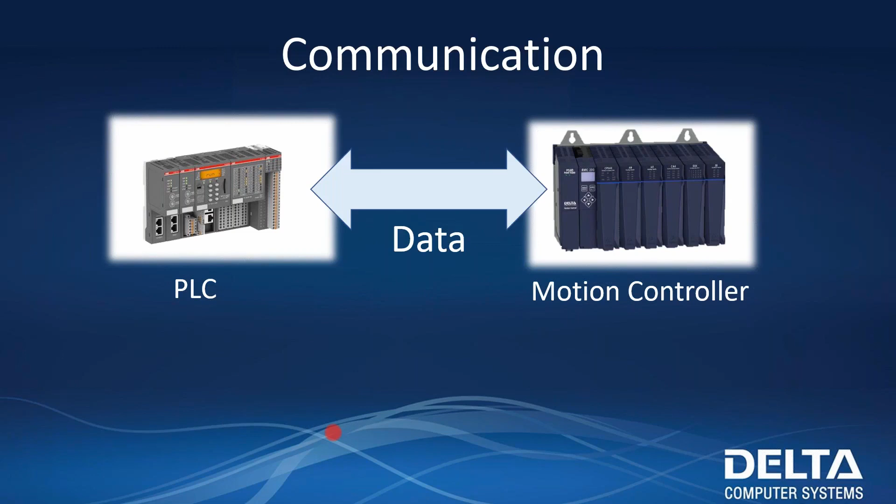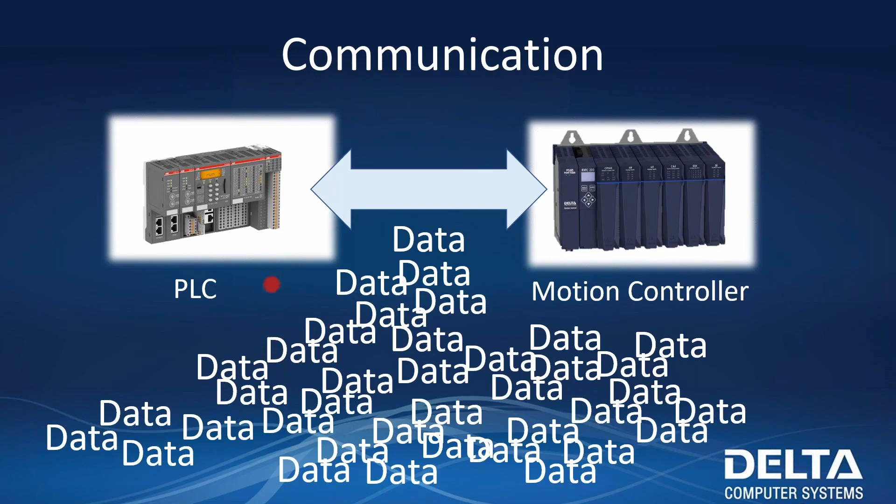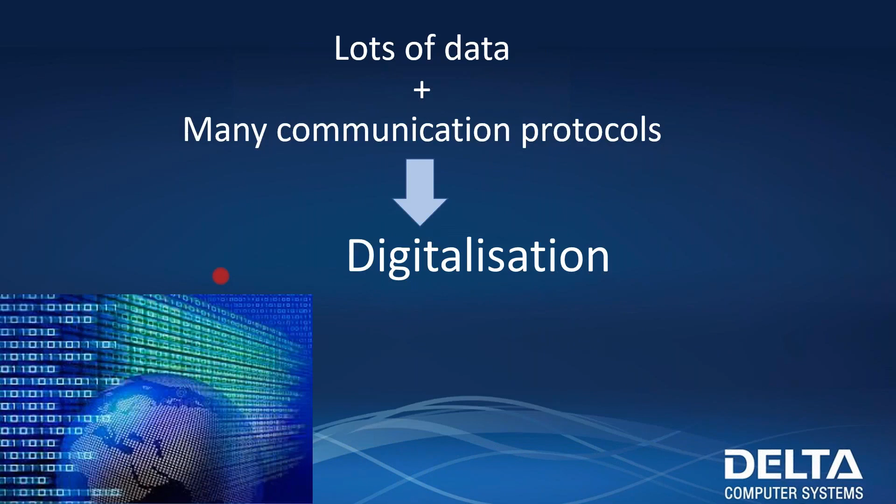Okay, PLC communication. Again, like I mentioned in the beginning, we can communicate with all popular PLCs. We can do this with Profinet, Modbus, Ethernet IP, many different protocols. Lots of data can be exchanged between the motion controller and the PLC. That's no problem on our end. So lots of data, many communication protocols. This is digitalization. Having digitalization is going to allow you to do things like preventative maintenance, improved efficiency, and improved cooperation between your whole system.

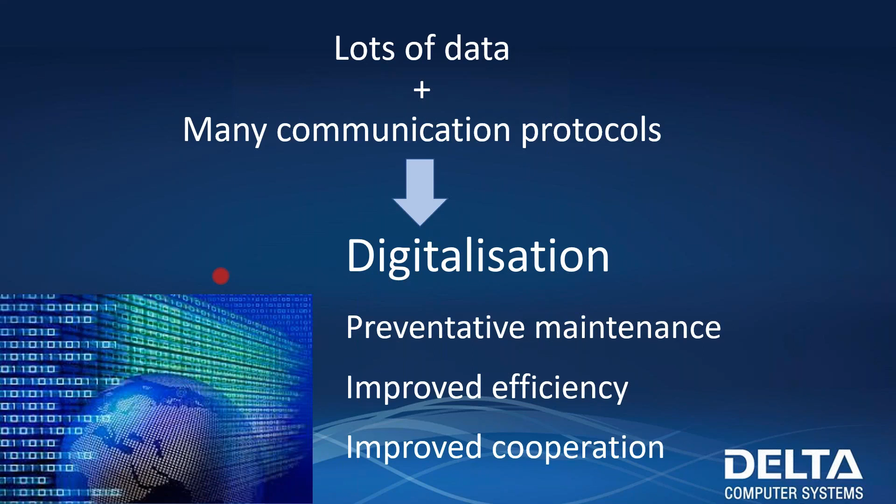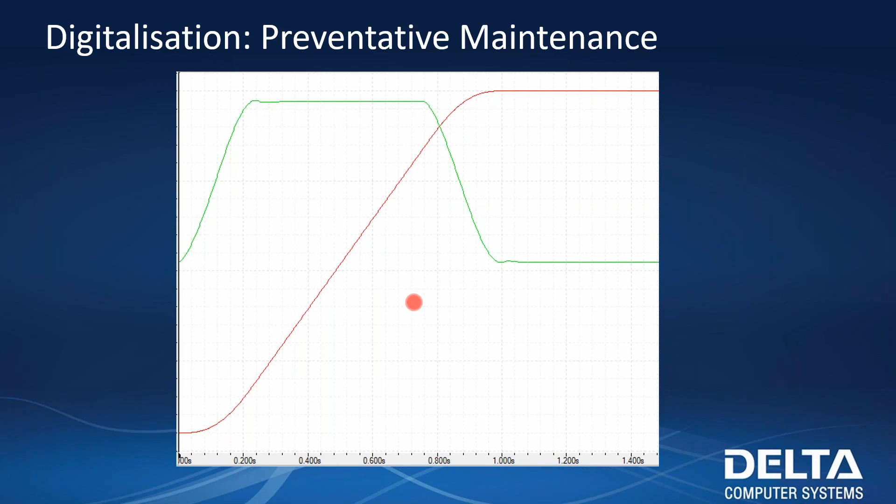Many people love the Delta controllers because we're able to gather all this information and give it to them in a meaningful way. Here's a quick example of preventative maintenance. We have our actual position here and our control output here. To see if things are changing mechanically in the system, we can actually add basically guides for the control signal. And if this control signal goes beyond these guides, you know that something mechanically has changed in the system. And when that happens, maybe you want to try a few more plots and see what's actually going on, so you can get to the root of the issue.

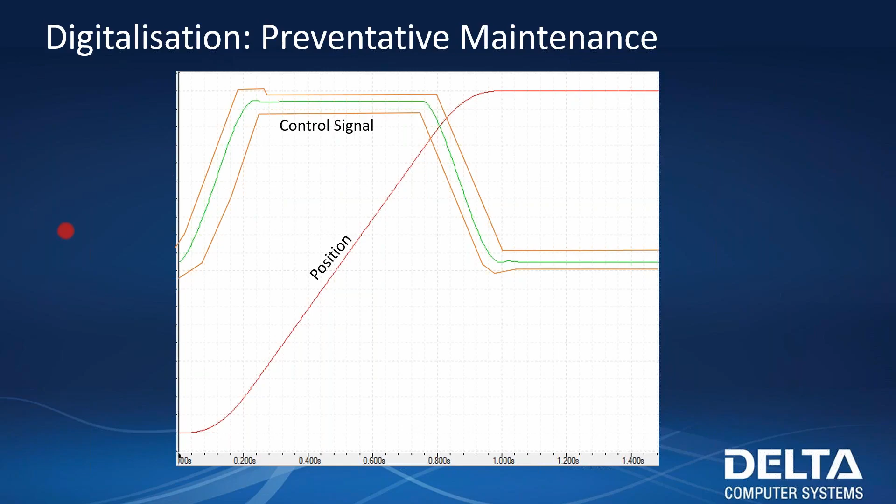Okay. So why a motion controller compared to a PLC? We have more specific motion control features than a PLC would. A PLC can do some of this. It can't do all of what we are doing here. In some applications, it might make sense to go with a PLC. In most high-precision motion applications, we found our customers to be much happier with the RMC, spend much less time getting things set up, and it's a whole lot easier to troubleshoot when something does go wrong.

We've got features rather specifically for hydraulics. That is really Delta's niche, high precision hydraulic motion control. We do a very good job at it. And when you have a system that is a little bit more difficult to control, we've got much more specific features for doing things such as this. If you'd like to look into that a little bit more, I'd encourage you to reach out. We've got a lot of great examples.

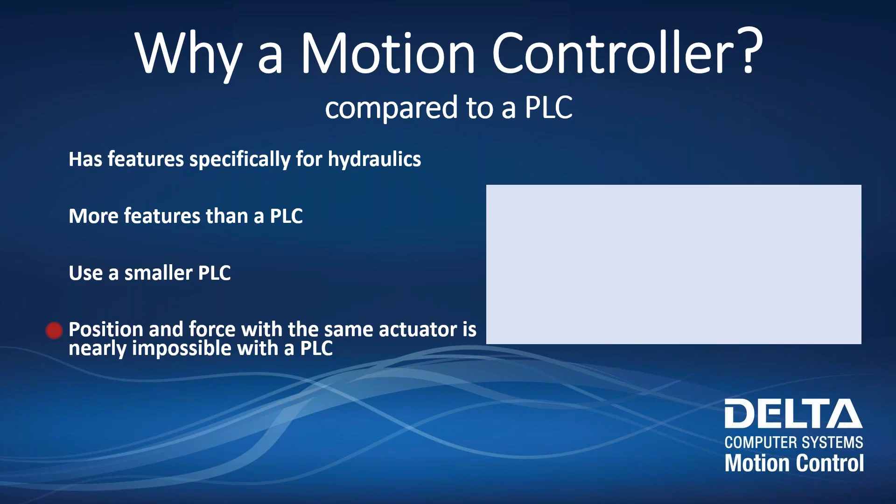You can use a smaller PLC as well, so you don't need a massive PLC doing everything. A lot of times people have a much smaller PLC to do the same job that they would if they were trying to have everything in one PLC. Position and force with the same actuator is nearly impossible with a PLC. This is true. It's very, very difficult. We've yet to come across a PLC that can do this position force application well.

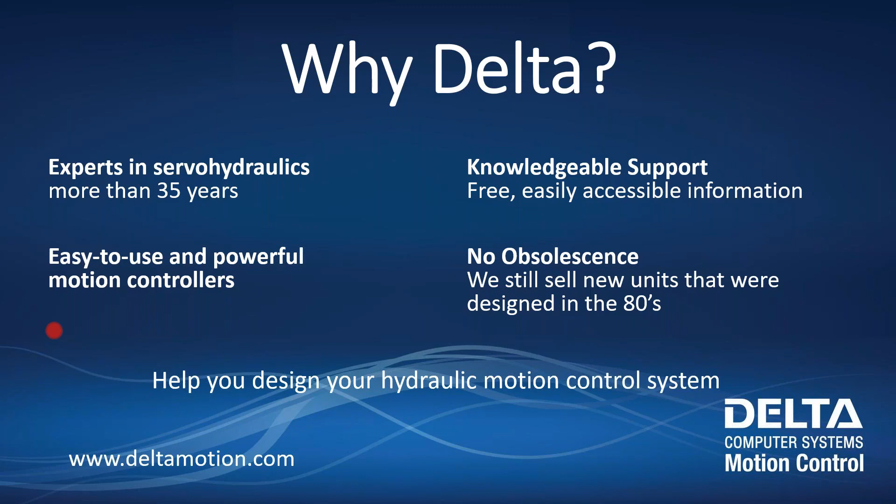Okay. And we can help you design your hydraulic motion control system. Not so much in that we'll give you designs for it, but we do publish a hydraulic design guide. This is a great design guide. It's put together by Peter Nachtwey, the president here at Delta. He's an extremely knowledgeable individual. He just made it into the Hydraulics Hall of Fame, and he is really the reason why Delta is where it is today. He has a very in-depth knowledge of hydraulic control. So if you would like this, we highly recommend you reach out and ask us for a copy. We'd be happy to provide one.

Okay, more information on RMC controllers. If this was just too much information too quickly, don't worry about it. We've got a nice training sequence of videos. It takes about an hour of time, and if you've got a new RMC Tools application, great resource here. Watch through these videos. It'll give you a really nice introduction and overview.